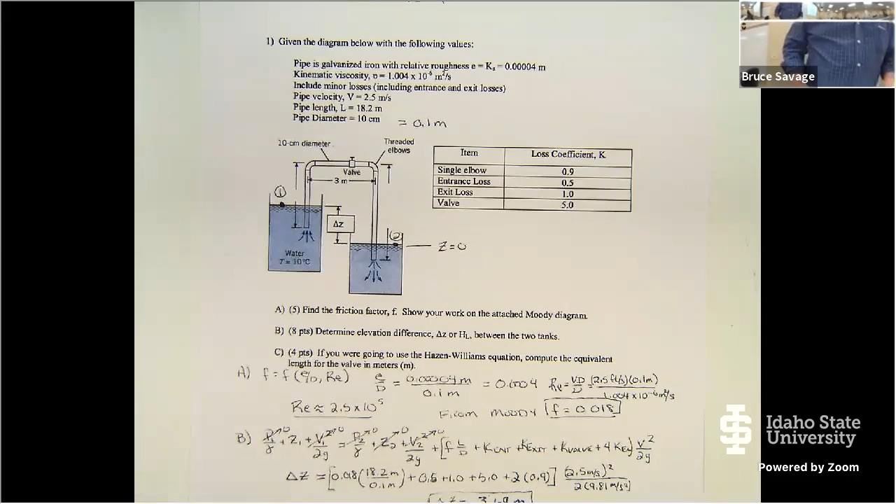So with that, let's go ahead and move through this. Rather than me sit up here and write it down, I'm going to put it up here and we'll talk through it a little bit. Hopefully that'll show up okay, and then we can zoom in a little bit there.

So we've got this reservoir system, two tanks. We know the length, we know the diameter, we know the minor loss coefficients, but we don't know the elevation difference between the two tanks. So the first goal is to find the friction factor, and show your work on the attached Moody diagram.

So I did expect to see something on the Moody diagram. If you wanted to use the equation, that was perfectly fine, and if you used it correctly you should get the same answer, or pretty close to the same. Realizing that it's really hard in the exam if you don't have a straight edge and you're in a hurry.

Question, okay, you never got your exam? Because I thought I'd emailed— oh wait, there's two that I didn't give to the grader. Whoops, and one of them is yours, and the other one's not here. TJ, I apologize, I did have the exams emailed, but your two got stuck somewhere, so I'll try and get yours out right after class. But everyone else get a copy of theirs? You can pick it up from my office. It should have been emailed, except for TJ's, where I made a mistake there.

I didn't write it down here, but there was probably 6 to 8 of you, I didn't keep track of the total, but there was an awful lot of people that wrote the Reynolds number as Q times D divided by the velocity times the kinematic viscosity.

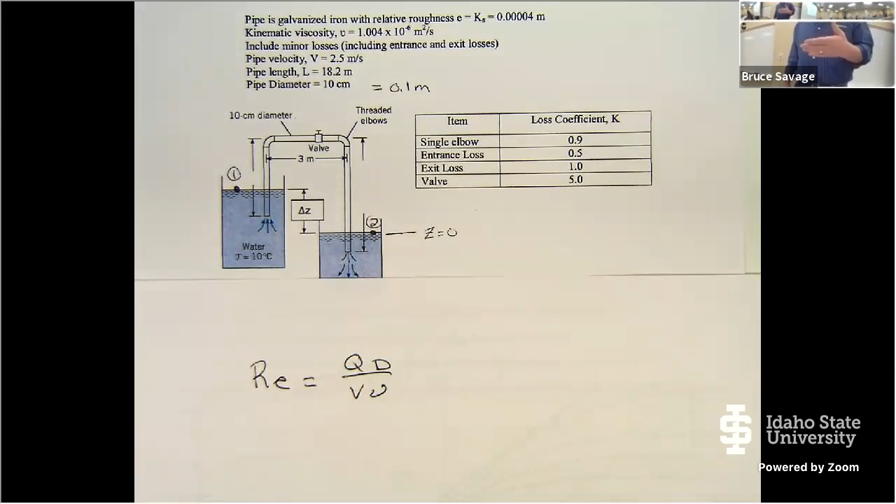I'm not sure where that came from, but there was a good number of students, and it's really surprising to me that you have a card with the equations in front of you and you still get the wrong equation. Not a lot I can do about that. I don't even know where this equation came from, because that is not a dimensionless parameter. So I took out 3 points there.

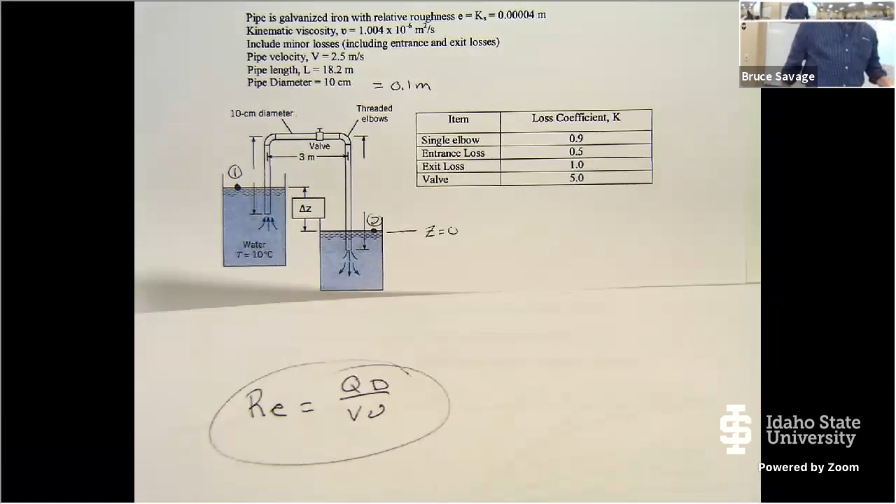It was pretty hard because this is something you've seen in fluids, we've used it multiple times here, and you have an equation card. There's only 2 points, but you should be able to get that, right? You should be able to calculate the Reynolds number, so that is not a dimensionless parameter. I can't remember exactly, but a bunch of students had the same wrong equation for the Reynolds number.

So knowing the roughness coefficient, K sub S, and the diameter, we can come down here and find E over D, and you need to be careful with your conversions. 10 centimeters, 0.1 meters, gives us 0.0004 as far as E over D, and then the Reynolds number, velocity times diameter divided by the kinematic viscosity, or if you want to use the flow rate, that's fine too. We get a Reynolds number of about 2.5 times 10 to the 5th.

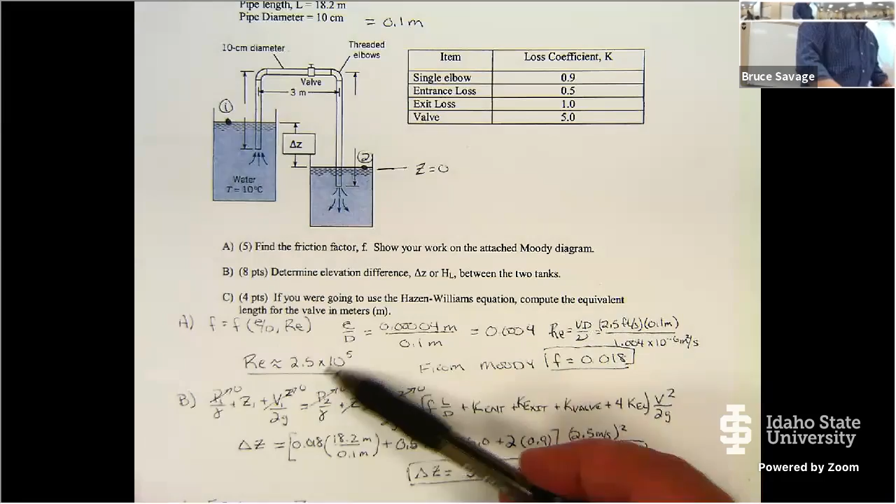So we come over to the Moody diagram. There's 1 times 10 to the 4, 1 times 10 to the 5, there's 2, and if you come, there's 4, so 3 is in here, so 2.5 is going to be right there. I'm going to identify my E over D right here, and follow that line up because we track the line until it intersects with the Reynolds number. When they intersect, we come straight over, and you should have gotten a friction factor somewhere around 0.018.

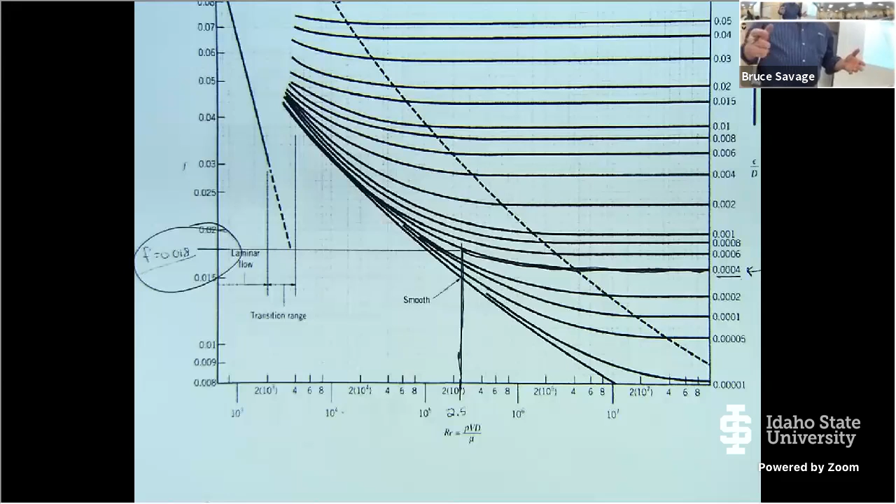I wasn't too critical of that because I know this is during an exam. So if your line didn't come over exactly, if you're at 0.017 or even 0.016, as long as I could see you had these 2 values correctly done and your line was just off, that was fine.

So given that, once we have the friction factor from the Moody diagram, we can come in with our energy equation and put in our minor losses. Everything here is a function of the velocity head. So what I have is Z1, and I set my datum at Z2, but you didn't have to, as long as you realize that Z1 minus Z2 gives me my delta Z, and that's what we're looking for.

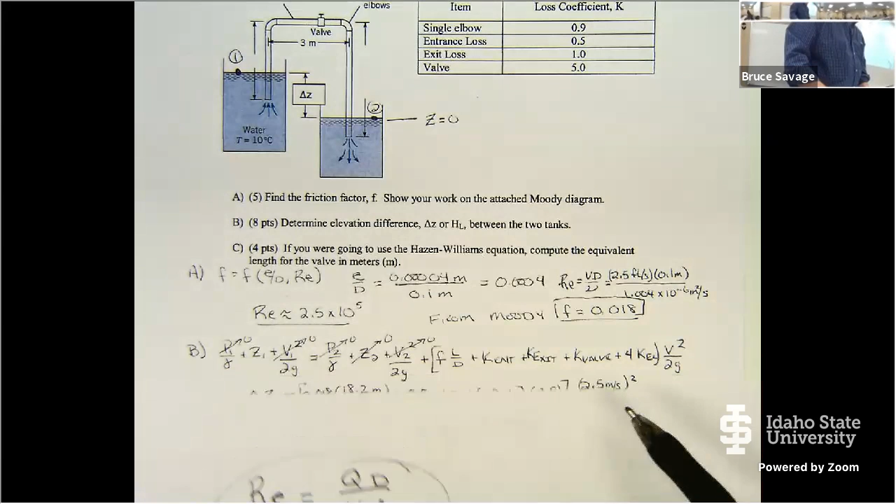So going ahead and solving this equation, I come up with a delta Z of 3.69 meters. You can round off a little bit there, so as long as you're close to that, that's good.

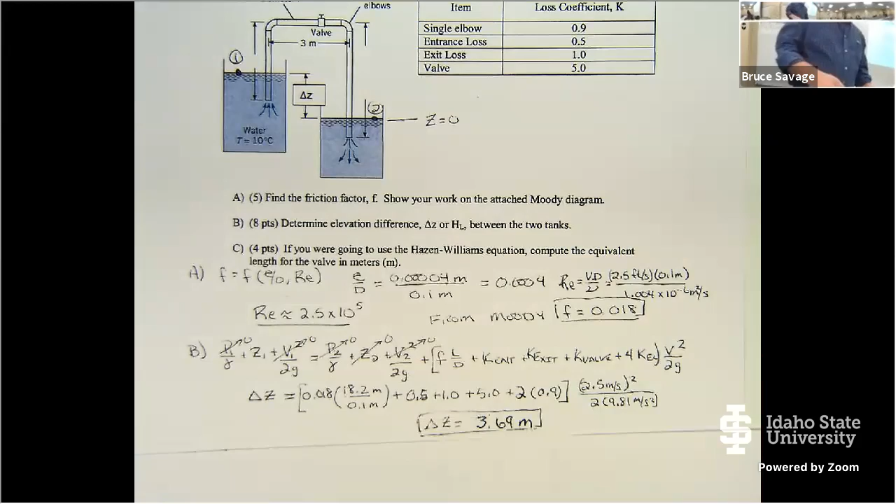And then we talked about the Hazen-Williams equation. If we want to use Hazen-Williams and we have minor losses involved, we even go back to the Darcy-Weisbach concept to calculate that. So that's where we have the minor loss coefficient of the valve equal to F L over D, and all we have to do is solve for L. That gives me, for a minor loss coefficient of 5 and a pipeline with a friction factor of 0.018, a length of approximately 28 meters.

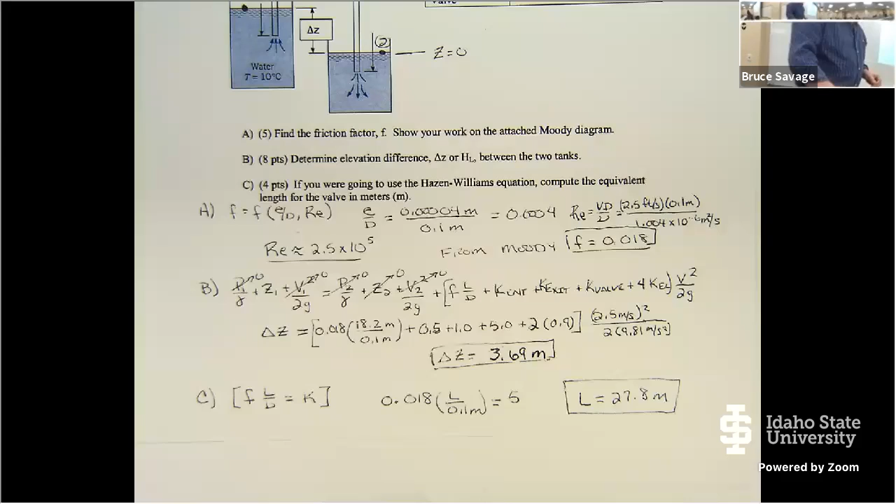Okay, any questions on that problem? This is a great time to ask them, because we are still using these concepts.

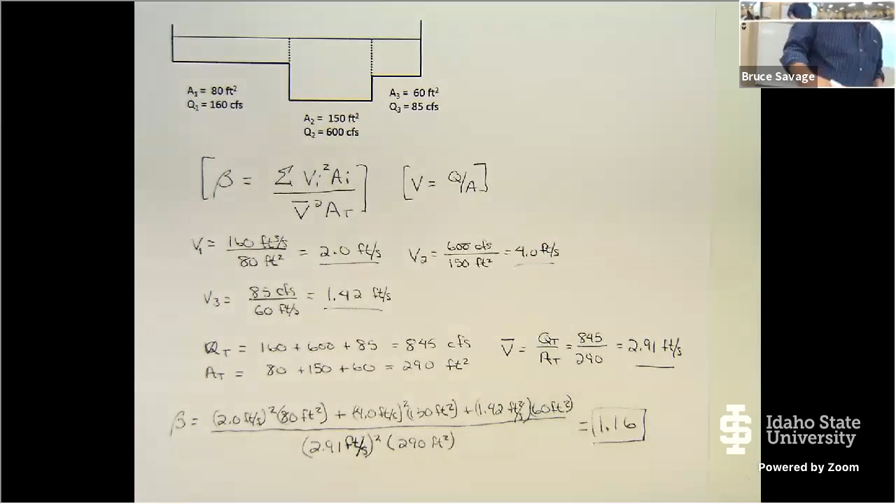Okay, problem number 2 is an opportunity to show me that you know how to calculate the momentum correction coefficient.

Once again, several of you used the energy correction coefficient equation, which is the wrong equation. Very similar, of course, but this is the equation. There are other forms of the equation, and I'm fine if you use those, but make sure you use them correctly. Some of you apparently grabbed an equation out of the book but didn't understand it, so you used it wrong, which gave you the wrong answer. The equation in the book, slightly modified with things moved around a little, will give you the same answer if used correctly.

So we're going to take the sum of the individual velocity squared times the area, and divide that by the average velocity squared times the total area, okay?

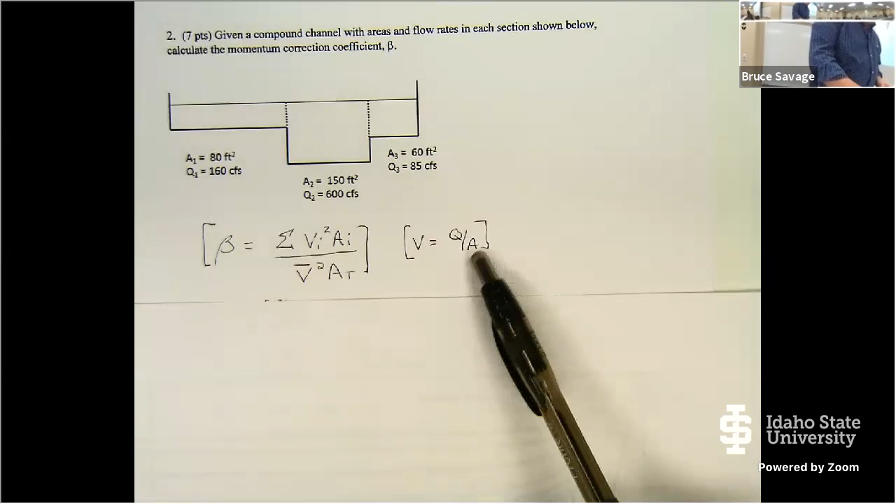Where V is equal to Q divided by A. So I went in there and calculated the individual velocities for V1, V2. Here's 1, here's 2, and here's 3.

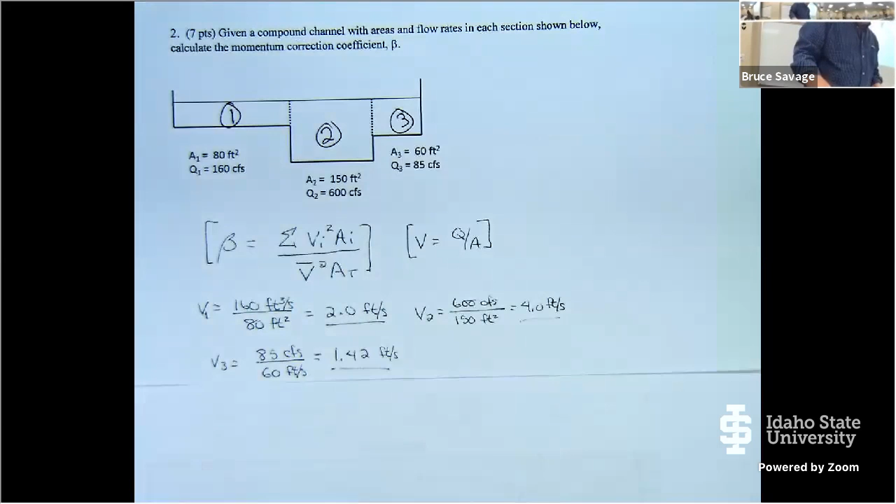Calculated those, and realized that V average, this is another big area that a lot of people miss, is the total flow rate divided by the total area. It's not the average of the 3 individual velocities.

You have to take the whole flow rate divided by the whole area to get the average velocity across the whole cross section. So once we do that, we plug it into that equation. You can see my individual parts here: V1 squared times A1, everything for 2, everything for 3, divided by the average velocity squared times the total area, gives me a beta of 1.16.

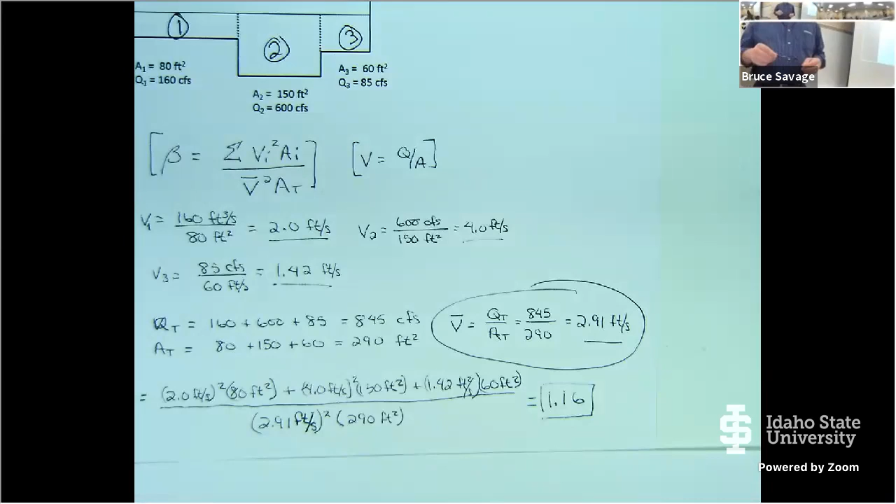If you're ever doing energy correction coefficients and you get an energy correction coefficient or a momentum correction coefficient less than 1, you've done something wrong. And if it's ever greater than 2, you've most likely done something wrong as well. It should be between 1 and 2 for the most part. There are some rare cases where it may go higher than 2, but they're pretty extreme.

Any questions on that? Any questions from those online? Okay.

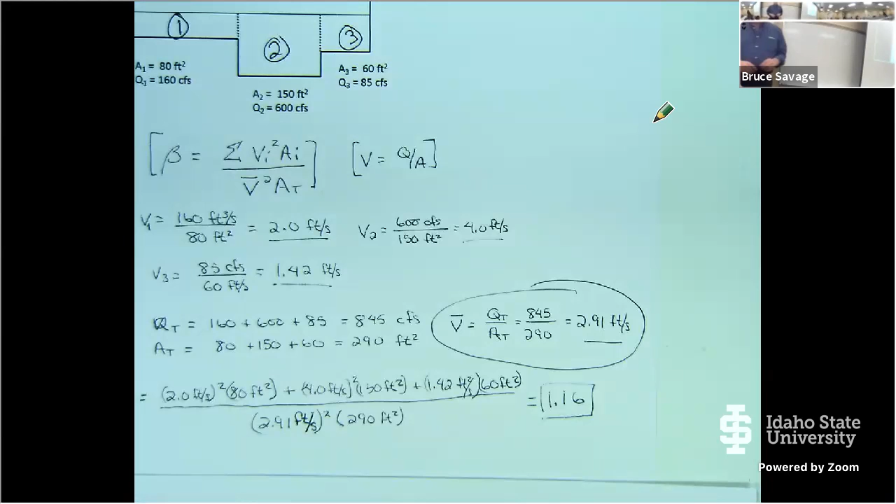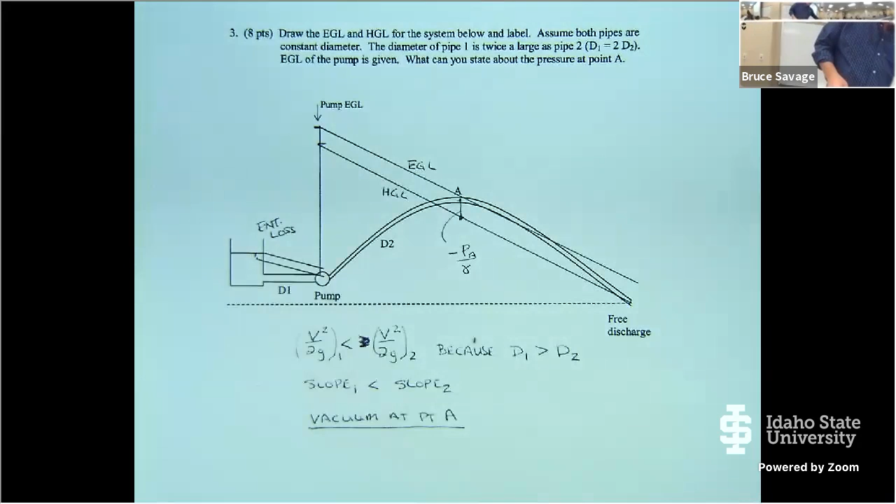EGL and HGL. I was looking for some key concepts here. The things I was looking for was that - so EGL, let me just take a step back, all right?

Remember, EGL and HGLs are only representative of what's going on in our system. They don't have to be exact, but they should be fairly close. And I tried to make these fairly close by telling you what the pump EGL would be up there, so everyone went to the same point.

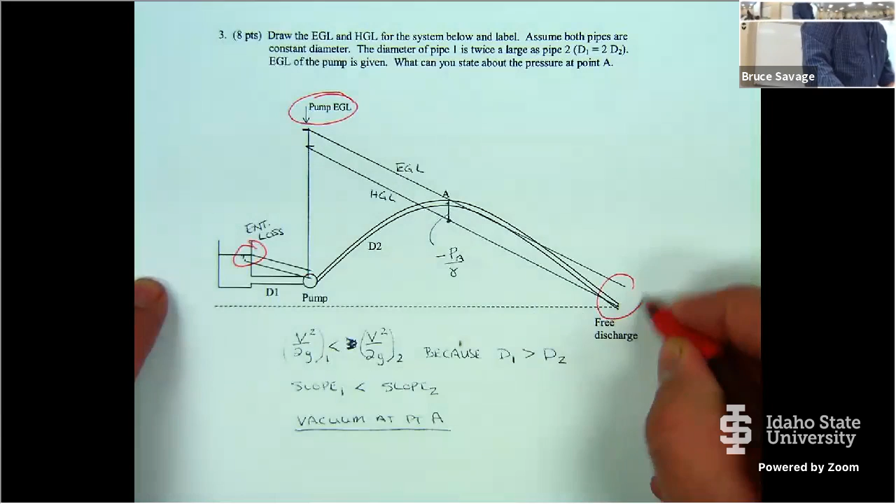So everyone should have the 3 common points: the water surface elevation at reservoir 1, and the free discharge of the pipe. The HGL always starts at the reservoir when there's no velocity and it goes through any kind of free jet. The pump EGL is the amount of energy the pump is going to add right there.

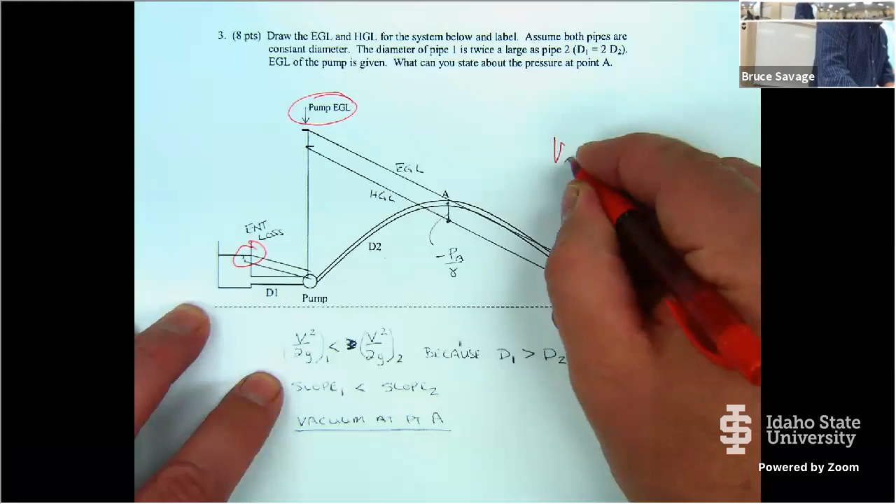The other things I was looking for: because D2 is less than D1, we know that V sub 2 is greater than V sub 1. And I've written it down there in terms of the velocity head, so it doesn't matter, but I was looking to see if your velocity head there was bigger than the velocity head there, because that difference represents the velocity head.

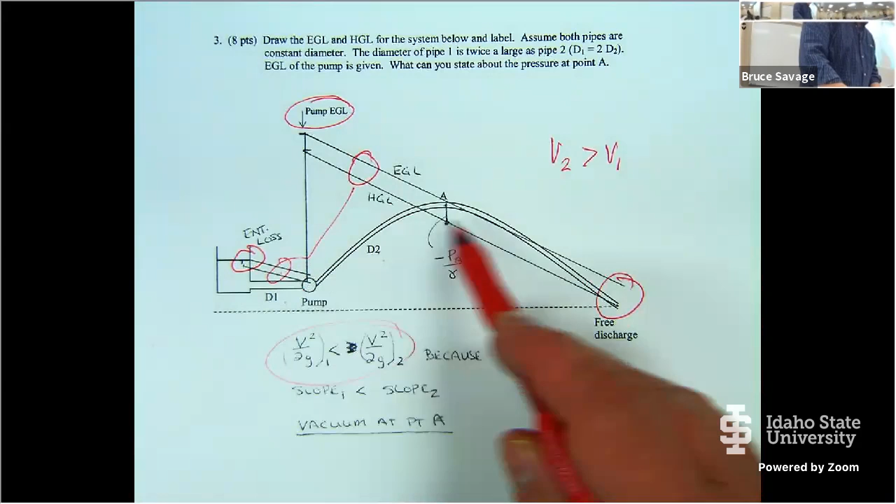So entrance loss coming down there, the slope - this isn't very accentuated on mine - but the slope of the lines at D1 should be less than the slopes at D2, because the friction loss in D2 is greater, hence the slope is greater. It is true for mine, but it's not very accentuated. I probably should have flattened these out a little more and made them more accentuated.

So I was looking for the difference in slope, the fact that you went through the free discharge down here, and given that if you went from there to there, your hydraulic grade line is going to be under point A. So the concept here for the second part of that problem is: what can you say about the pressure at point A? It's going to be a vacuum, it's going to be negative, because the HGL is underneath the elevation of that point, and that's what I was looking for.

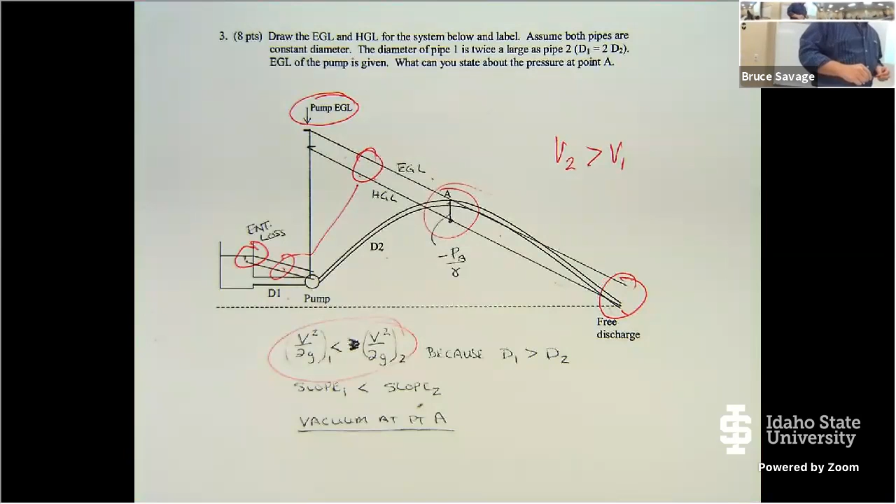Okay, questions on EGLs and HGLs? These are powerful concepts that we will continue to use as we do 3 reservoir problems and pipe networks. Okay, you guys are being awfully quiet today.

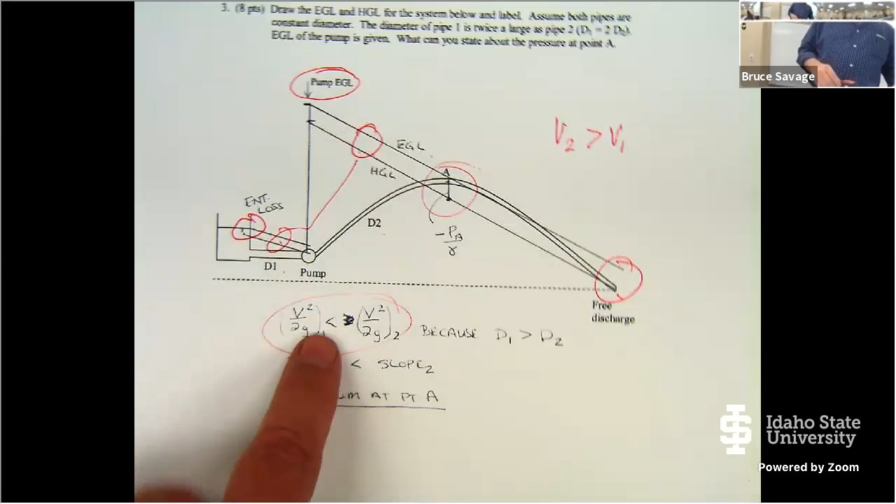Yes? What exactly is the difference between the EGL and the HGL? The velocity head. Okay.

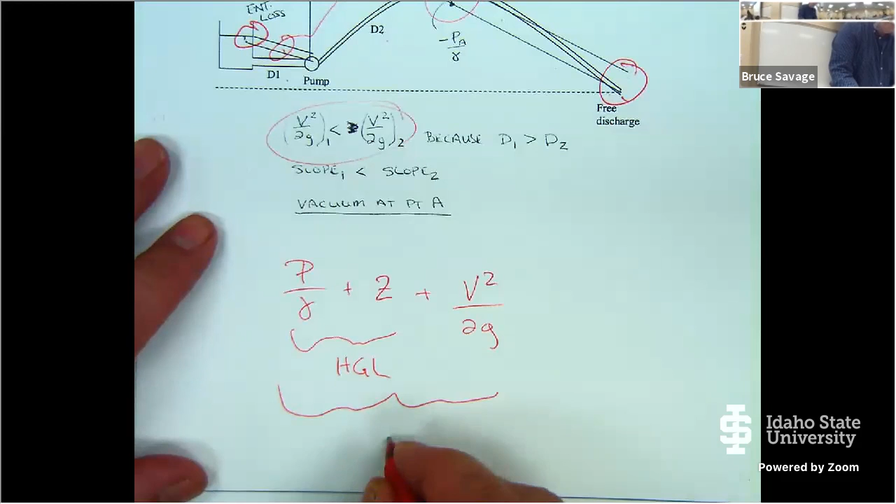So if you think about the energy equation, this right here is the HGL, and everything together is the EGL. So the difference between them is the velocity head.

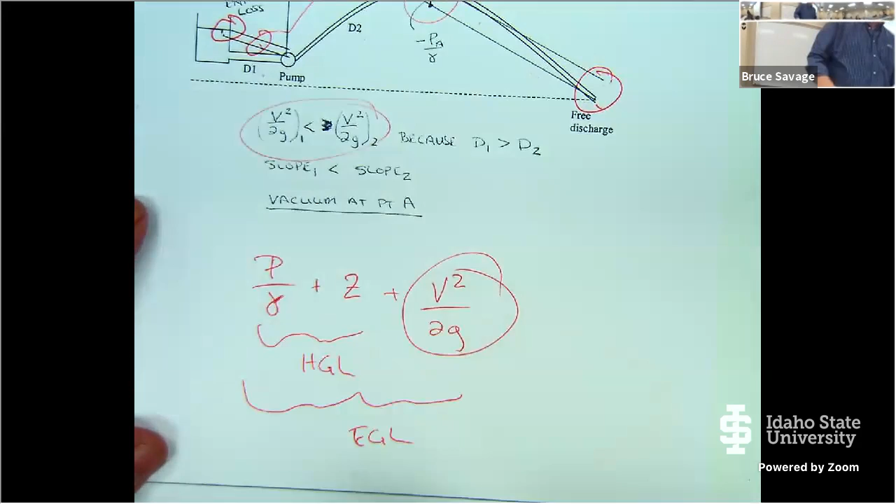And what does P over gamma represent? P over gamma, yeah, your pressure head. That's the pressure head you have in your system. Okay?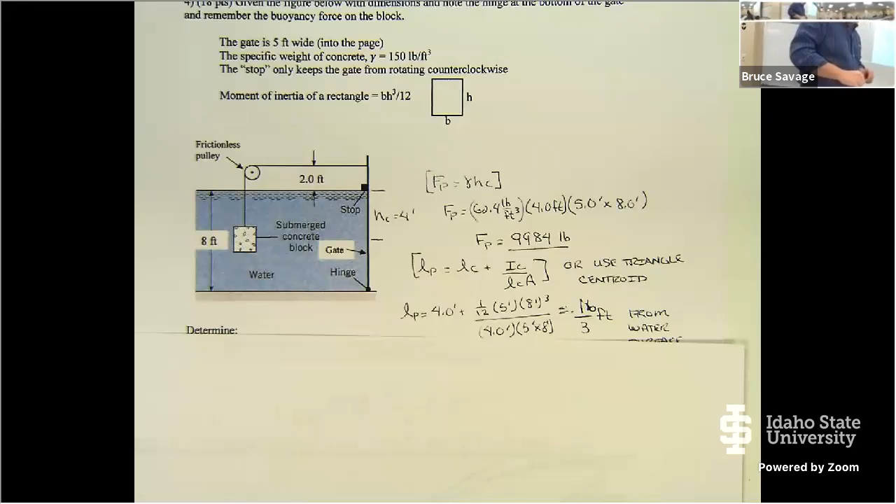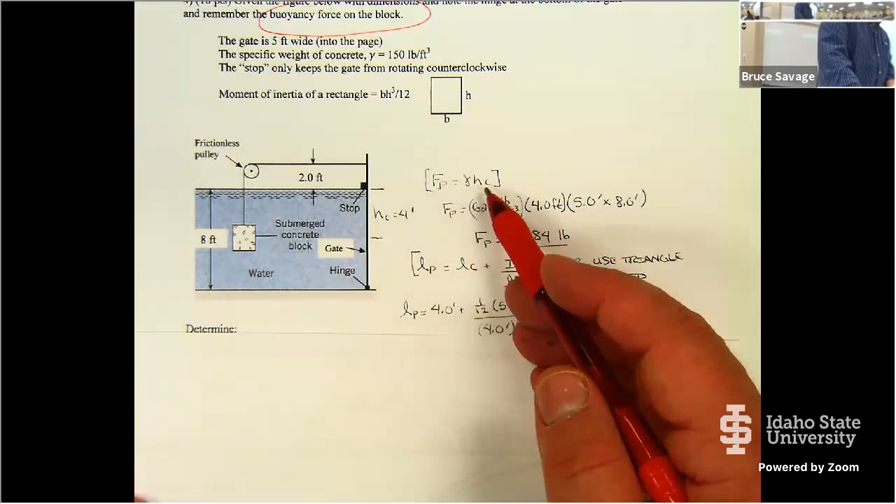And I gave you a hint here: remember the buoyancy force on the block, take that into account because that's easy to miss. So, first thing we find is the pressure force, pressure is equal to gamma H C - you see I had a mistake there, that should be times the area as well. So I did it down here, but I missed it in my equation. So gamma H C times A.

Little hint here. When I'm giving exams, you are more than welcome to draw on the diagram itself.

On homework, I want you to draw free body diagrams. On this one, you should have drawn some mini free body diagrams, but there's nothing wrong with coming in here and saying, I know there's a pressure distribution like this on the gate, if that helps you out.

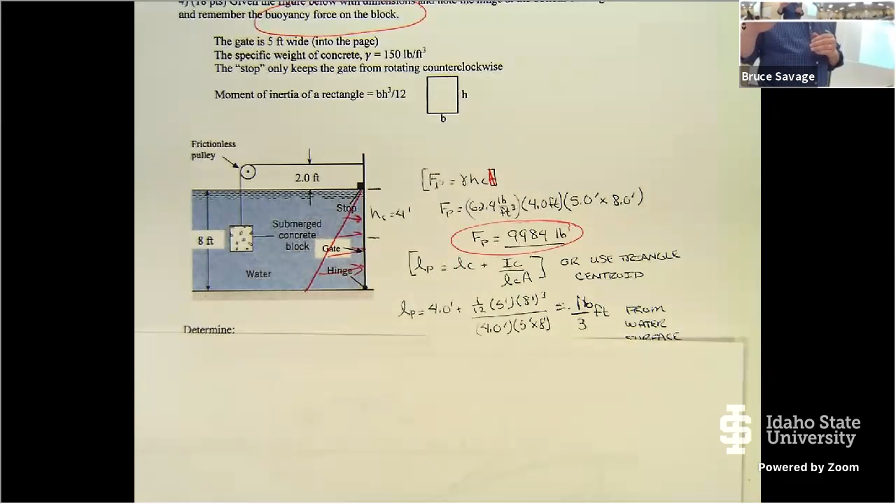I can find the pressure force by gamma HC times A. HC is the centroid of the gate, not the centroid of the pressure distribution diagram. The gate is 8 feet tall, so the centroid is halfway down, because that's where the centroid of the rectangle is at. Knowing that, we can now calculate the location of the pressure force.

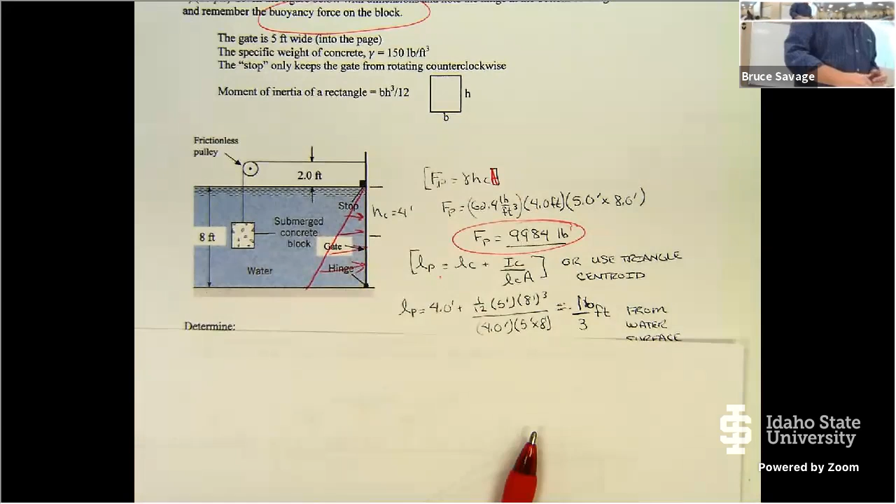And if you remember, and this was fine if you remembered, you didn't need the equation, that the pressure force acts through the centroid of the triangle of the pressure force distribution diagram, that means this distance here is 1/3 h.

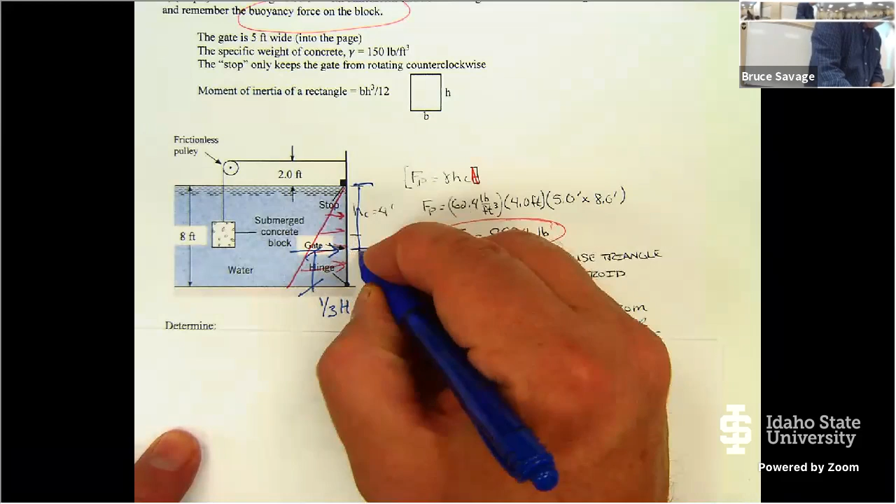Now if you go ahead and use the equation, you're going to find out it's actually 2/3 down this way, or in this case, because it is 8 feet tall, it occurs at 16/3 feet down from the top. Remember, the LP measures from the top.

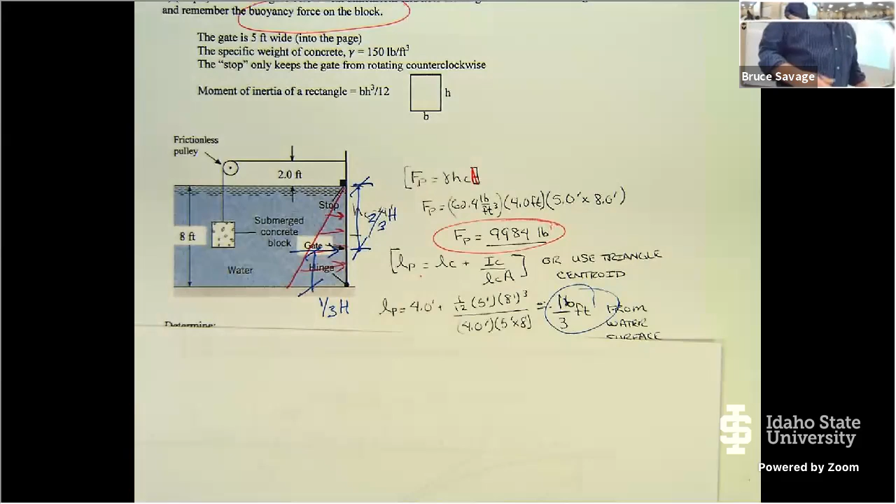So the equation is going to give you 2/3 of h right there, hence the 16/3, and you could have just used that, and I would have been fine with that.

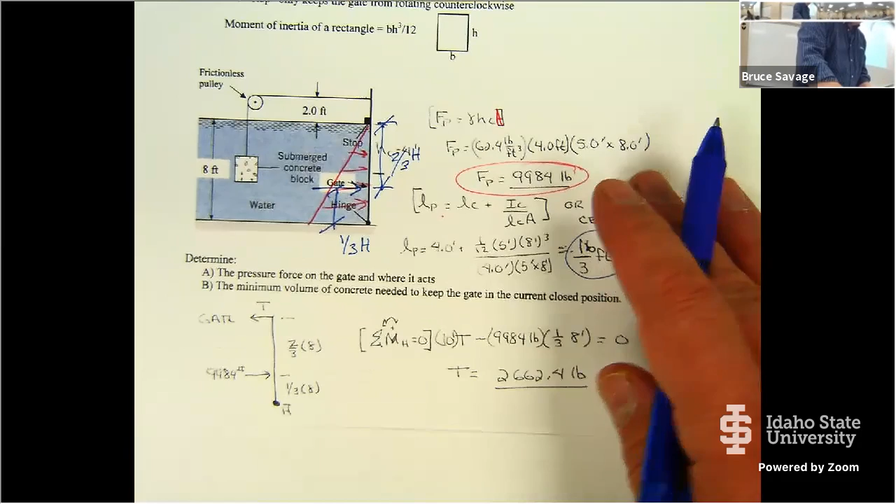But now that we know the forces on the gate, we can now draw a free body diagram of the gate to calculate what's going on up there in that cable. So down here, I did a quick free body diagram. I've got the hinge down here.

Now technically speaking, there would be a force right here on the hinge too, right? Force in the x direction on the hinge. So I've got 2 unknowns, but in order to get rid of one of them, I can take the sum of the moments about this point to find the tension.

Or if you wanted to, you could take the sum of the moments about the tension, about up here, and calculate the force at the hinge, and then you can take the sum of the forces in the x direction and get T. That's just the longer way of doing it.

Think back to basic statics. We've got those 2, well, we got 3 if you want to take sum of the forces in the y, 2D problem. So you could have done one extra step and still found it by taking the sum of the moments about T, but the easiest way is to do it about the hinge, because it gets rid of this one, which I don't care about.

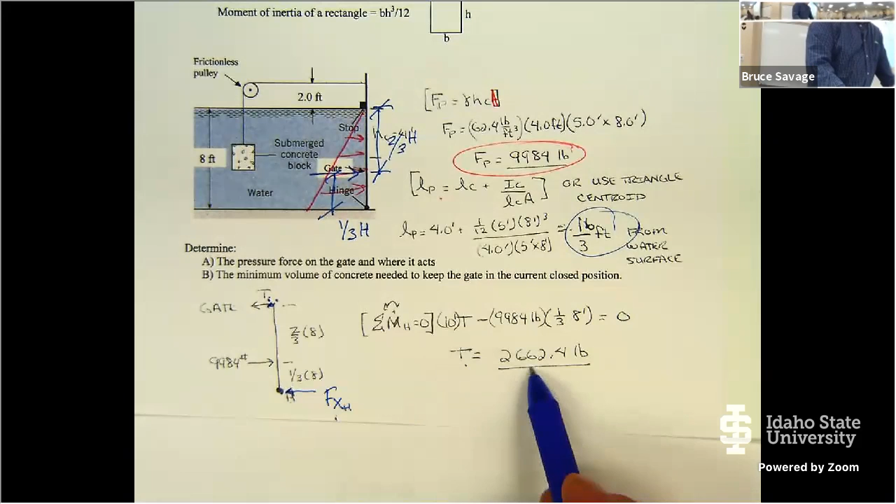Now I can find T. T is 2662. And once I find that, now I can draw another free body diagram over to my block, noting that I have a tension pulling up, I have weight of the concrete pulling down, and I've got the buoyancy force also trying to lift the block.

So sum of the forces in the y direction, noting that the weight component is the weight of the concrete times the volume. The buoyancy force is the weight of the fluid that is displaced times the displaced volume, and they happen to be the same volumes, just different gammas.

So now I can go ahead and put that in my equation, and I can solve for my volume, and it's right around 30.4 cubic feet.

Any questions about the concepts?

Mr. Brooks: Yes, how did we get the 10? Why multiply with 10? How did I find T, the tension? No, the 10. The value of 10.

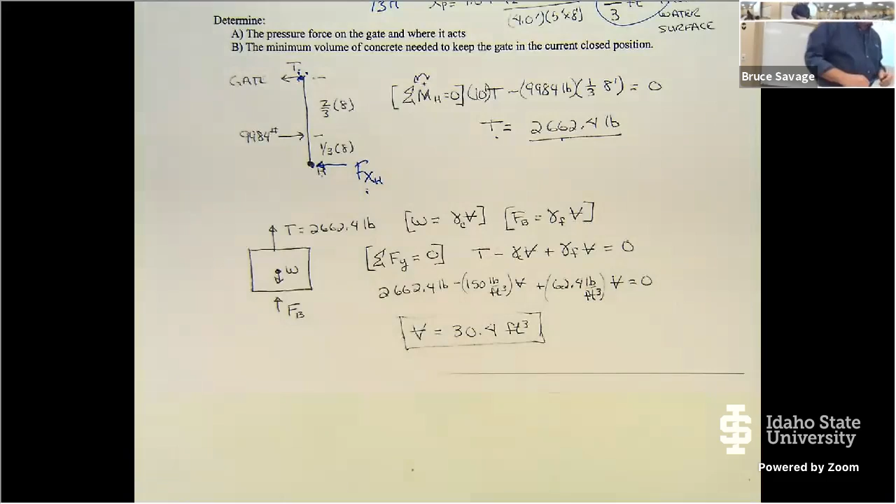The value of 10 comes from the fact that I know the water level right here is 8 feet, and the gate where the cable connects is 2 feet above it. So that's where the 10 comes from.

Okay. Other questions? Okay, all right, so let's move on.

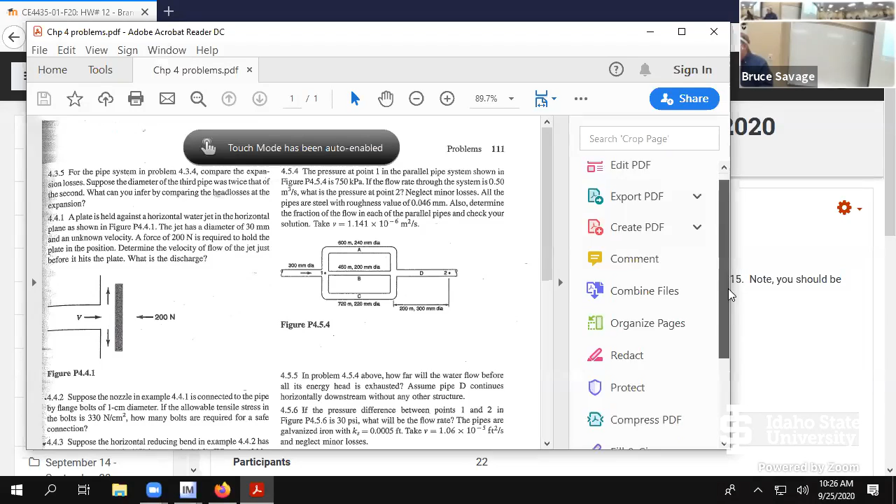Okay, so assume that the pressure difference between points 1 and 2 is 30 psi. What will be the flow rate? All right, the pipes are galvanized iron. We got that. Okay, so it's coming back to me now.

So this is the scenario when we know the head differential between these points, but we don't know the flow rate. So we're trying to find it, and we need the flow rate to calculate the Reynolds number to find the friction factor. So this is a complex problem that requires you to iterate on a branch network, solving this branch multiple times. You have to make some guess as to either friction factor or flow rate in each one of those pipes to get an initial value.

And so while it seems simple, the pipe comes in, splits into two, and goes over, it becomes an accounting mess because you've got so much going on. Now there are ways to solve this where it's not so bad, if you have access to a solver like Excel or some other solver. So the pipe comes in here, splits, goes over here, and we get this point down here.

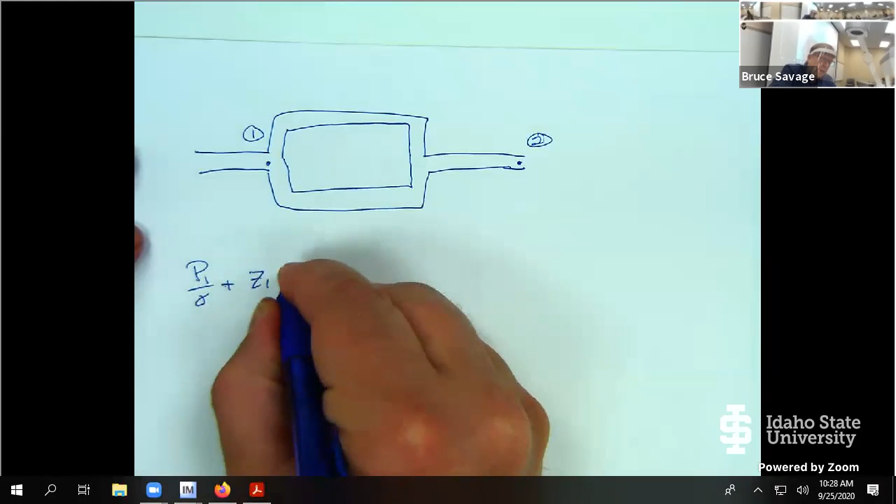Okay, so if this is point 1 and this is point 2, our major equation is going to be the energy equation between points 1 and 2.

Noting then that our head loss has to be the loss - I forgot, how are these numbered? A, so this one's A, and B, C. Okay, so noting then that the head loss is going to be either up around A and over to point 2 through C, or B.

So plus then F, if I take the top route, F sub A times L sub A divided by D sub A times V sub A squared over 2G, plus then F sub C times L sub C divided by D sub C times V sub C squared over 2G.

Okay, so that gives us one equation. But we also note that the head loss across A is equal to the head loss across B, right? We know that. So I could just as easily replace this with the head loss at B, because they would be the same thing - doesn't matter if I'm going across A or across B.

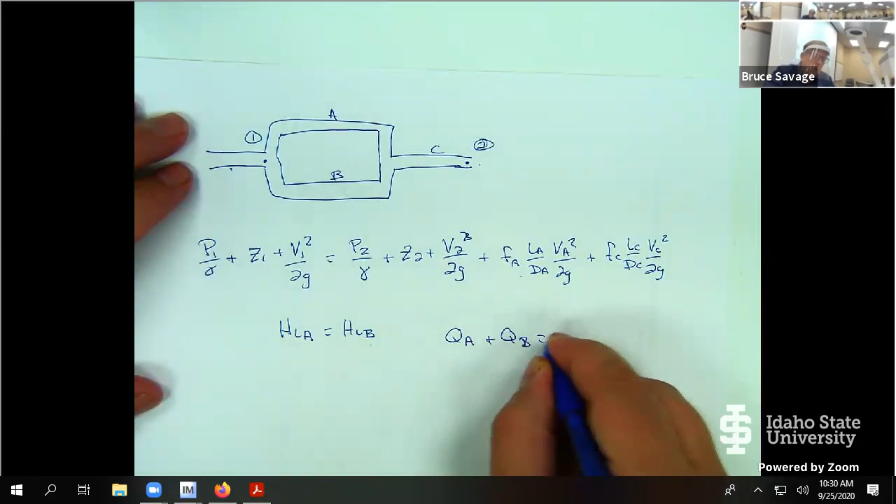And then the other equation I'm going to need is the relationship between those: I know that Q sub A plus Q sub B is equal to Q sub C, which you could rewrite as V sub A times A sub A plus V sub B times A sub B equals V sub C times A sub C.

And we identify then what our unknowns are. Well, the unknowns are V sub A, V sub B, and V sub C - that's what our unknowns are, and all of our friction factors. Now our friction factors are unknown too, but if we have our velocities, then we know our friction factors. So we're back to what we did with the single pipeline - yes, these are unknown, but now we have to iterate.

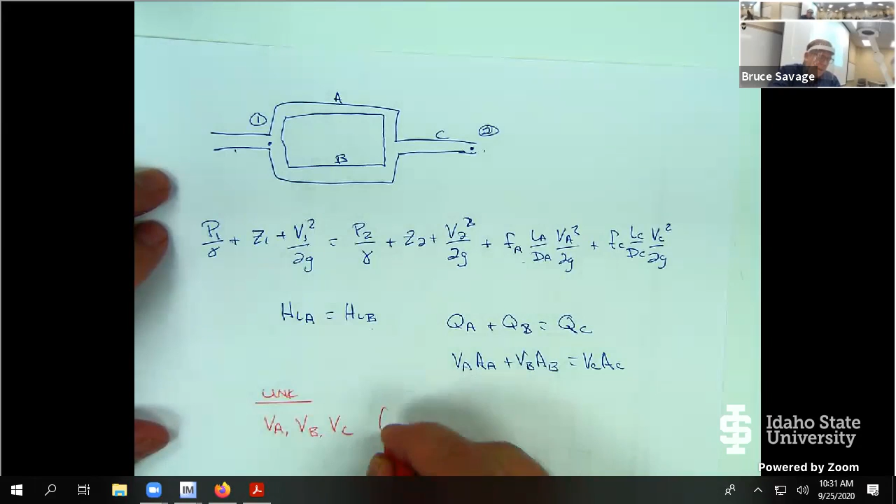So once again, we select a friction factor, stick that friction factor in here, and we can solve through these relationships what our velocities are. Now we take our velocities and E over D and go back and refine our friction factor, and then do the whole process again until it converges.

So you would assume a friction factor for A, B, and C that are all the same, because they'd likely be different - you could either do the same or different, doesn't matter. But if you overestimate A, that's going to potentially reduce B and C. So how do you know which way to move? You don't have to know which way to move - the equations automatically fix it for you, because once you assume a friction factor, it's going to give you a flow rate. That flow rate, you'll find a Reynolds number, and with that Reynolds number, you'll go into Moody, and it will tell you which way it goes.

Okay, it will automatically adjust. Now, if you're saying, wow, would we really do this in practice? Well, in reality, we have equations for the friction factors. We would use Swamee-Jain, or the Colebrook-White equation if you want to get really fancy.

So if we say our friction factors are unknown, our equations to solve for those are the three friction equations. But they introduce three more unknowns, the Reynolds numbers, since we have to write the Reynolds number for three different pipes.

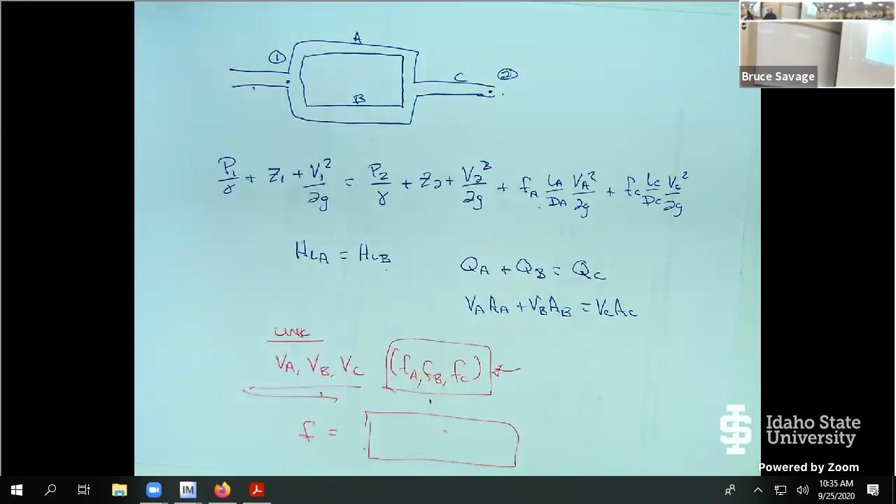Okay, so that's a really good question, and I think this points out where we need to be really careful. Let me come back to this problem here. So they gave us the K.

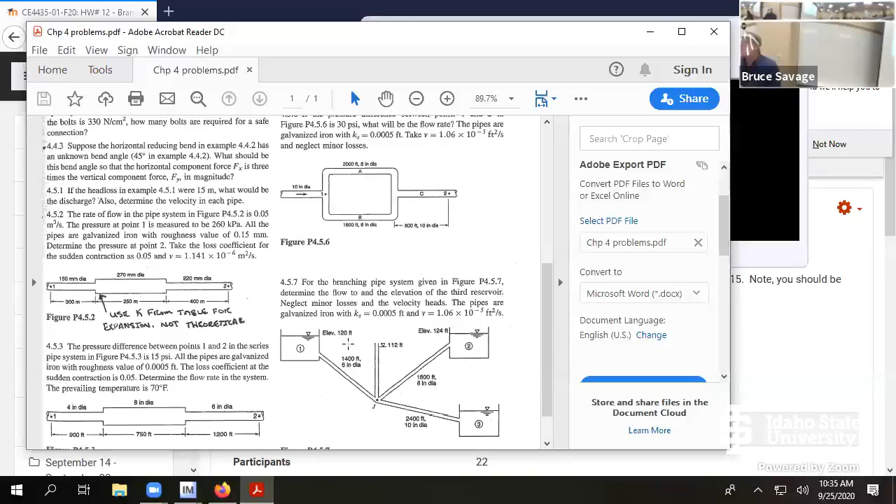What's that? Sorry, your cursor is down on 4.5.7. We're up on 6. Oh, thank you. All right, so they give you a K factor. Tammy, I'm not trying to single you out here, but when you say they gave you a K factor, tell me in your mind how this correlates back to Hazen-Williams.

The friction factor times L over D is equal to K. Okay, so good, you helped explain here.

So we need to make sure that we clearly understand that the K in this problem is the equivalent sand roughness, which is completely different from the minor loss coefficient. The equivalent sand roughness is the average height of the sand particles. So that is not the K that we would bring it back to. But nonetheless, Cami raises a really good point.

While the K is different, what we do know is that this is galvanized iron. So if you wanted to, you could actually go into a chart and find the Hazen-Williams coefficient, C sub HW, for galvanized iron, and you could write the Hazen-Williams equations for friction losses across each of these pipes, and it would be a whole lot easier because it would fall right out and you wouldn't have to iterate.

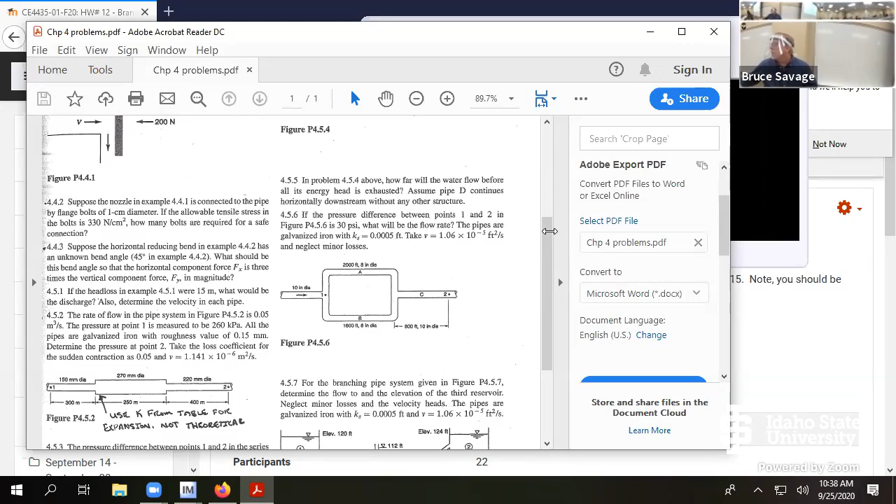Anyone online have questions? Could you maybe go over the first homework problem a little bit?

Okay, sure, let me jump back up here. The first homework problem is exactly the same as the one we just went over, except now there are 3 pipes. Rather than iterate, I gave you the friction factor for the first 3 pipes. Let me bring this up here. This pipe comes in, and I'll turn this back on for those online in just a second. For those here, give me a minute to do a quick sketch.

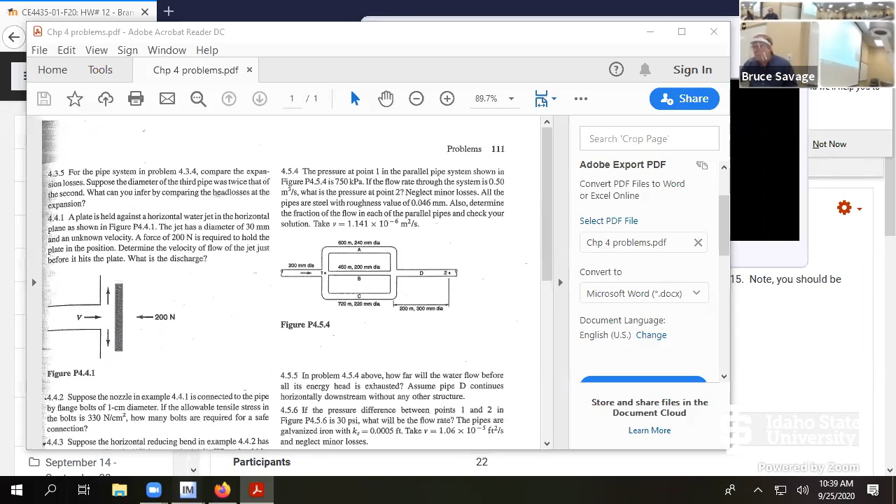I think this is a little different in that they give us the flow rate. In this case, the flow rate is known: Q is equal to 0.5 cubic meters per second. Now jump back to this. So this is kind of the same thing. I'm going to write the energy equation from point 1 to point 2.

I'm going to note my head loss is a function of whatever path I take, whether I go across A, B, or C. So let's say A again: F sub A times L sub A divided by D sub A times V sub A squared divided by 2G, plus F sub D times L sub D divided by D sub D times V sub D squared divided by 2G.

Noting that this one right here could be replaced by F sub B times L sub B divided by D sub B times V sub B squared over 2G, or F sub C times L sub C divided by D sub C times V sub C squared divided by 2G.

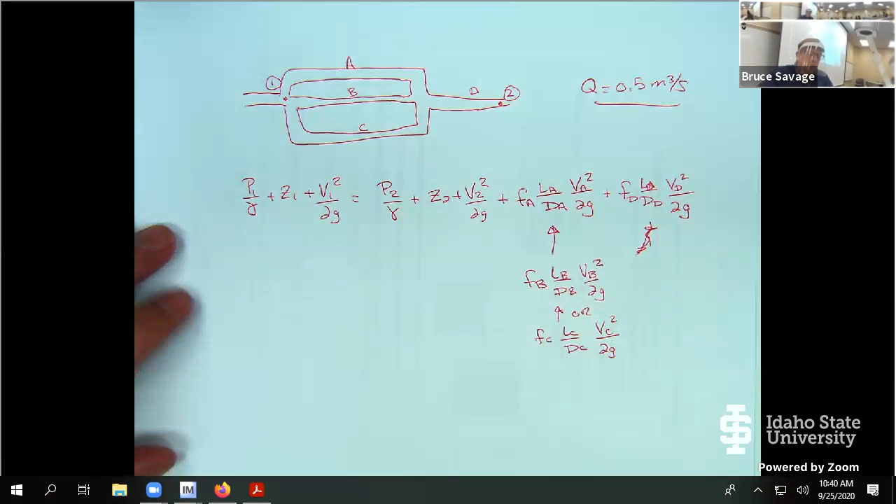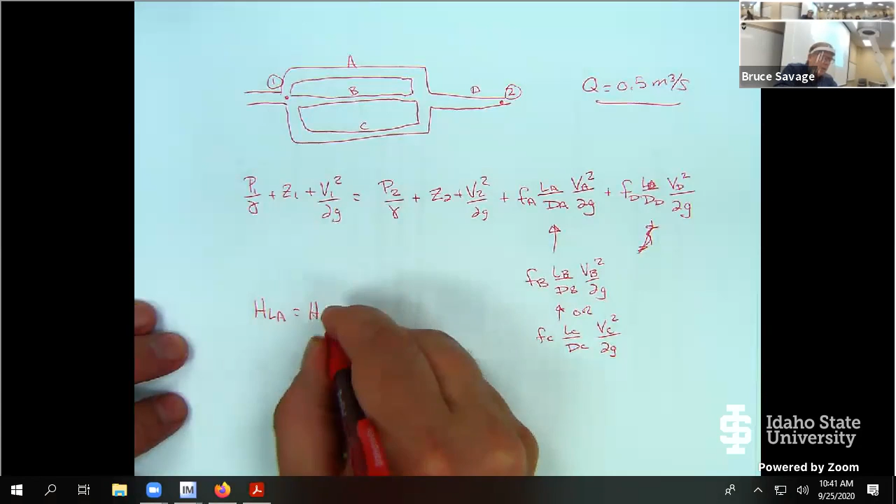It wouldn't matter, I could use any one of those. I can also note that the head loss across A is equal to the head loss across B, which is equal to the head loss across C, meaning these three things are equal. I also know that Q sub A plus Q sub B plus Q sub C equals 0.5 cubic meters per second. So that's my knowns there.

Now note, I gave you these three values right here. What I did not give you was F sub D, but we know the flow rate and we know the roughness height, so now we can find F sub D using the Moody chart or the equation. So F sub D is now a known.

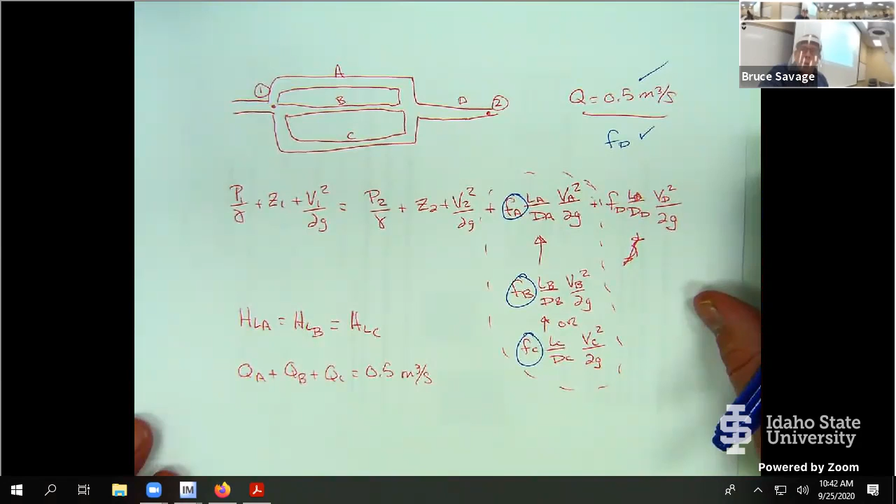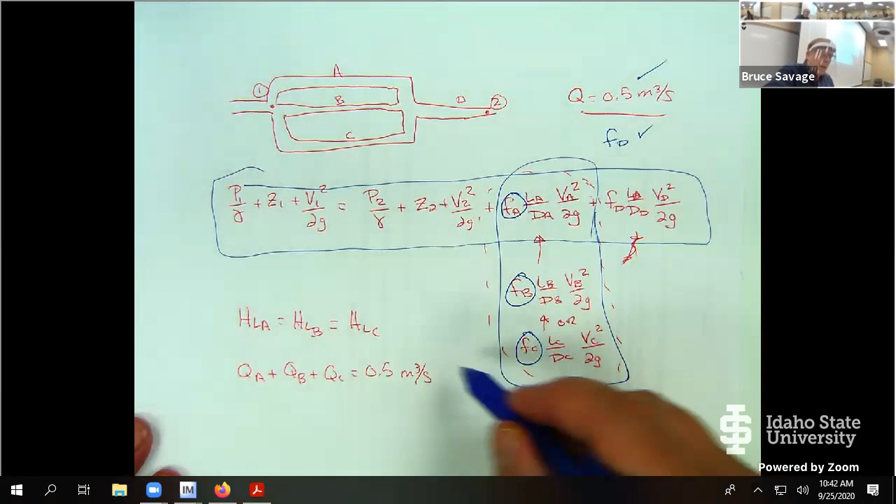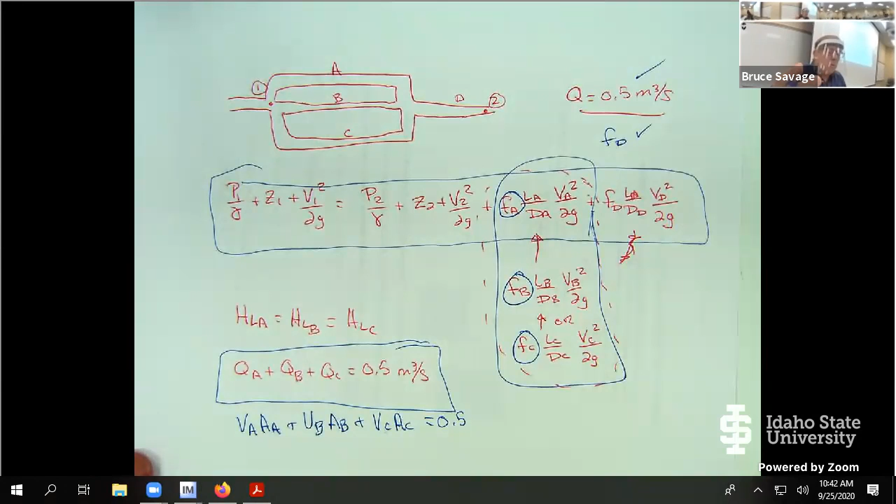So now it's basically the same process as the other problem. I can solve these equations, realizing all three head losses are equivalent, and rewriting the flow equation as V sub A times A sub A plus V sub B times A sub B plus V sub C times A sub C equals 0.5. So my three unknowns in this case, since there are no unknown frictions and Q sub D is not unknown, are the three flow rates, and I have my three equations, 1, 2, and 3.

Okay, so Laura, does that help a little bit?

Okay, I think you're still muted. Laura, did you say something? Yeah, that helps, sorry, I forgot to unmute. That's fine, joys of technology.

All right, so it seems like we had a little bit of a problem with this. Do you guys have class at 9? Are my office hours at a bad time? Okay, just wanted to make sure. Since it seems like there are quite a few questions about this, I will give you more time to work on this if you want to keep working on this homework, okay, so that's not a problem.

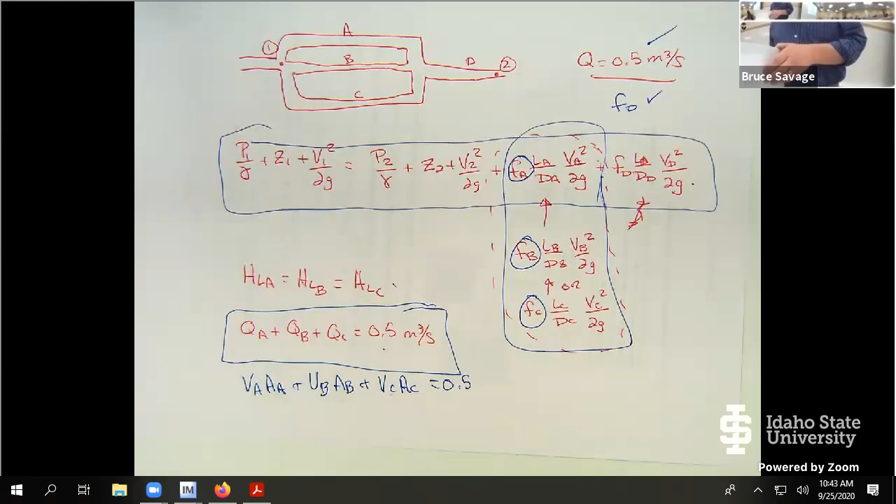All right, any other questions? Okay, we're not done yet, it's good quality time here. One of my favorite sayings about higher education: the only place you're willing to pay more to get less, right?

Passing down the road, is it gonna be okay? Yeah, no, not right there.

For those online, this is posted to Moodle, so you can print off a copy. Although we're not going to get all the way through it, but at least we kind of set it up today.

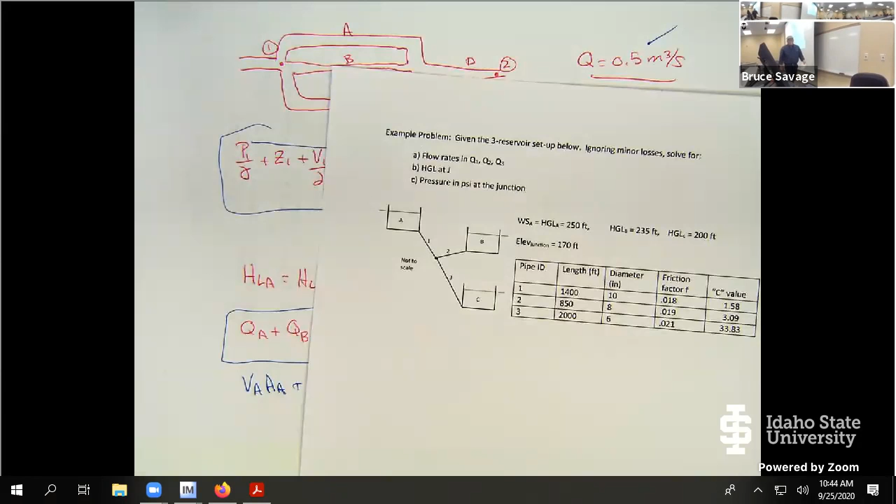So we have a 3 reservoir problem here, and I wanted to work through the numbers.

Given the 3 reservoir setup, ignoring minor losses, solve for the flow rates in the 3 pipes, the pressure or the hydraulic grade line at junction J, and the pressure at the junction as well.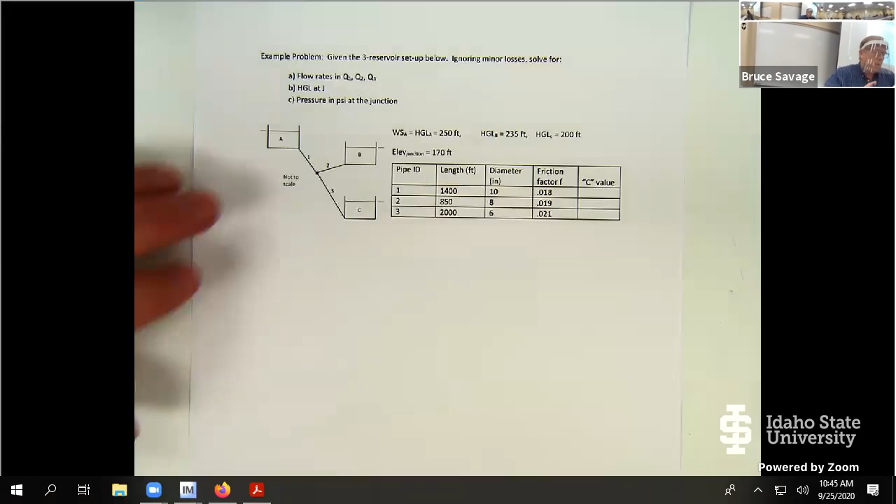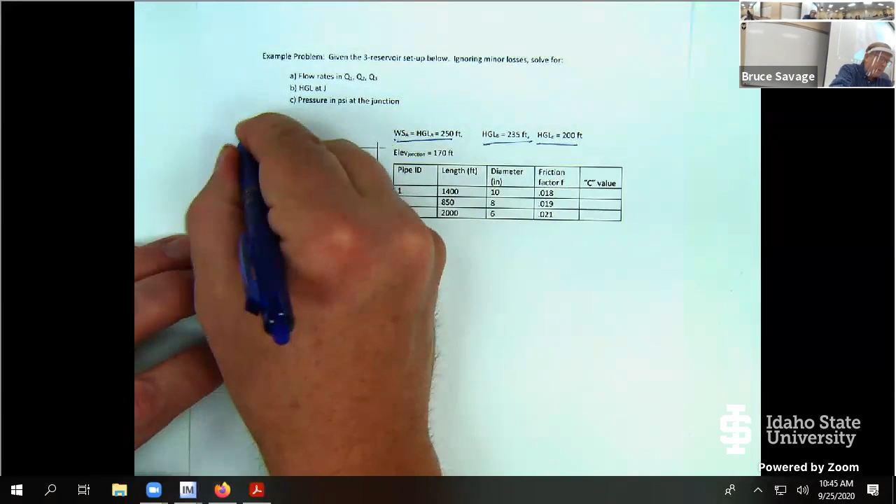Noting that my water surface elevation is equal to my hydraulic grade line, reservoir A is at 250 feet, B is at 235, and C is at 200.

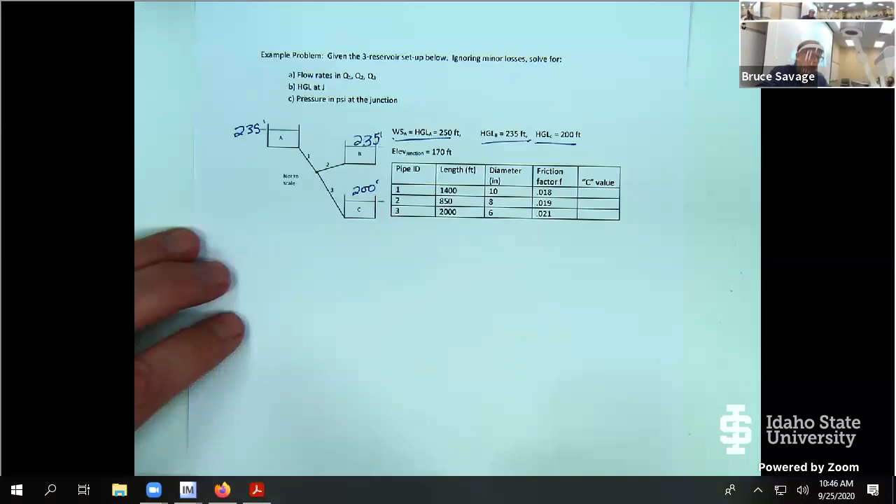250, thank you. It's kind of interesting that wearing glasses with this shield distorts everything a little, because it's bent, and I'm going to use that as my excuse, whether I should or not.

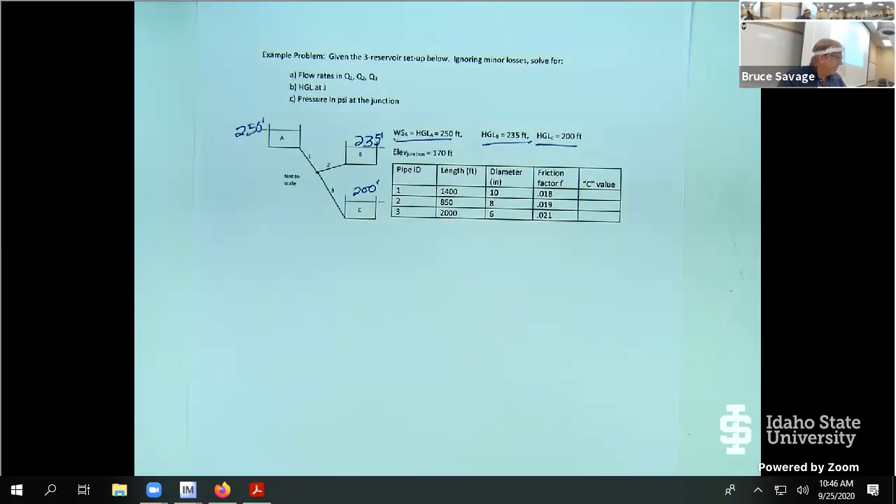All right, so when we look at this, tell me, what are the directions of flow in this system that we absolutely know?

Going down from A? Okay, so A is definitely flowing down here because it has the highest amount of energy. And from there, it's flowing into C.

Can we say anything about B? We don't know, right? We don't know whether the flow is going from B or to B. Or in other words, to B or not to B.

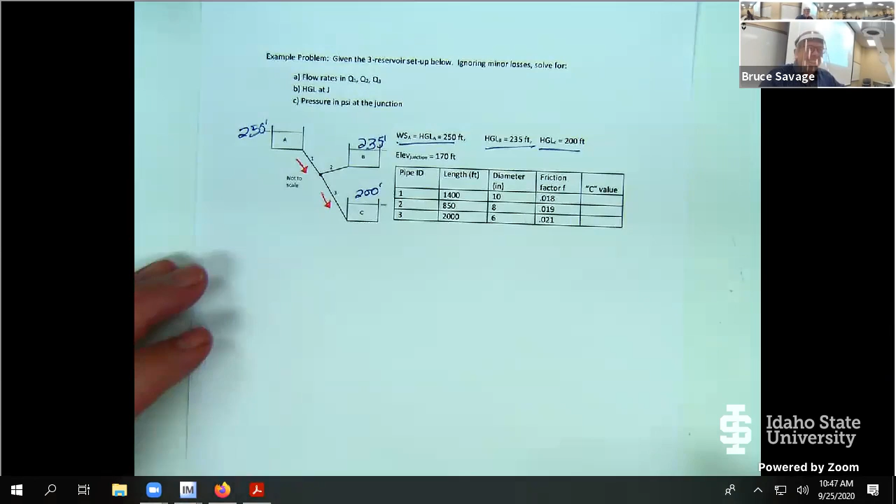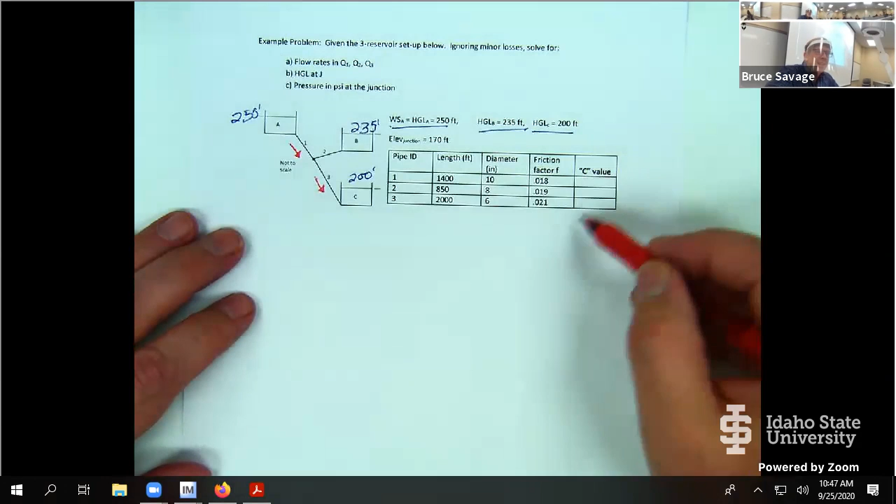So that's what we need to figure out here. In order to do that, we can simplify our problem by first finding the C value. Remember, C equals F L over D times 1 over 2G A squared, plus the sum of the minor losses times 1 over 2G A squared, in simple terms, assuming it's all the same diameter of pipe.

In this problem, we're going to ignore minor losses to keep things simple, so I can go ahead and solve for my different C values.

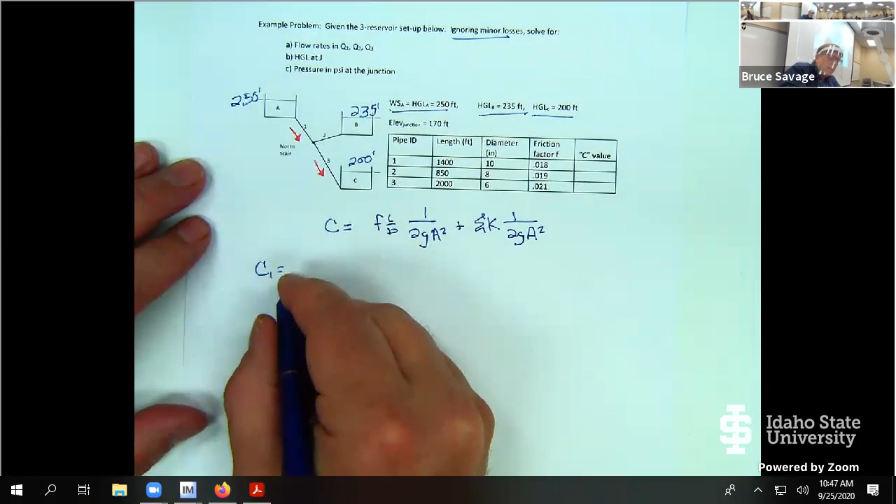C sub 1 equals 0.018 times L, which is 1400, divided by the diameter - make sure you use the right units, 10 inches divided by 12 to get it into feet, to make that dimensionless - times 1 over 2G, 32.2, times the area, which is pi divided by 4 times 10 divided by 12 squared, then I square my area as well. When I do that calculation, I get 1.58.

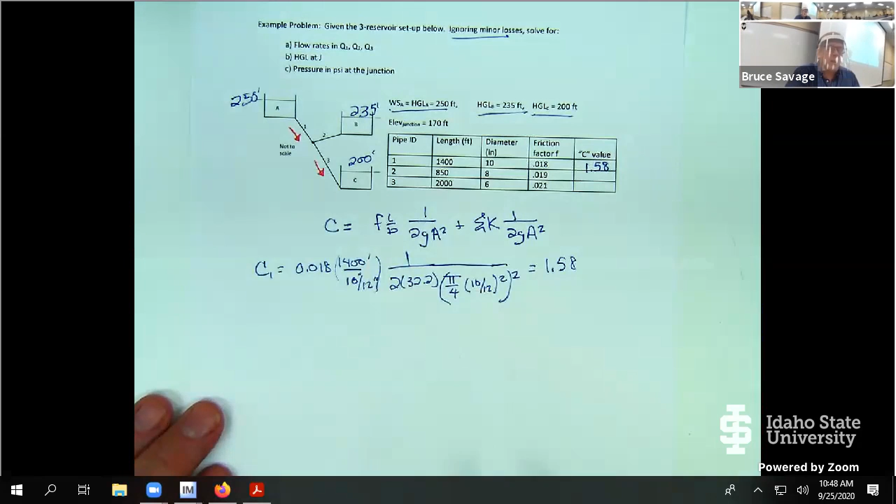So C sub 1 is 1.58. I could do this exact same thing for pipe 2 and pipe 3, plugging everything into this equation. When I do that, I find C sub 2 is 3.09 and C sub 3 is 33.83.

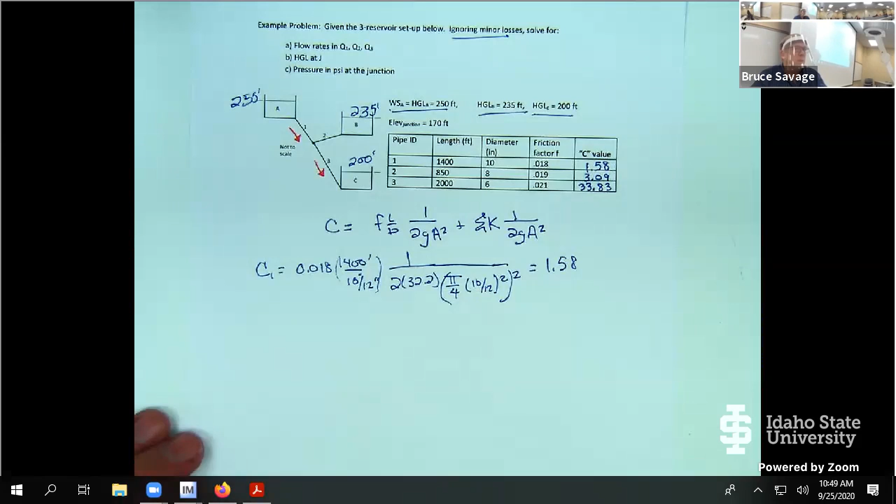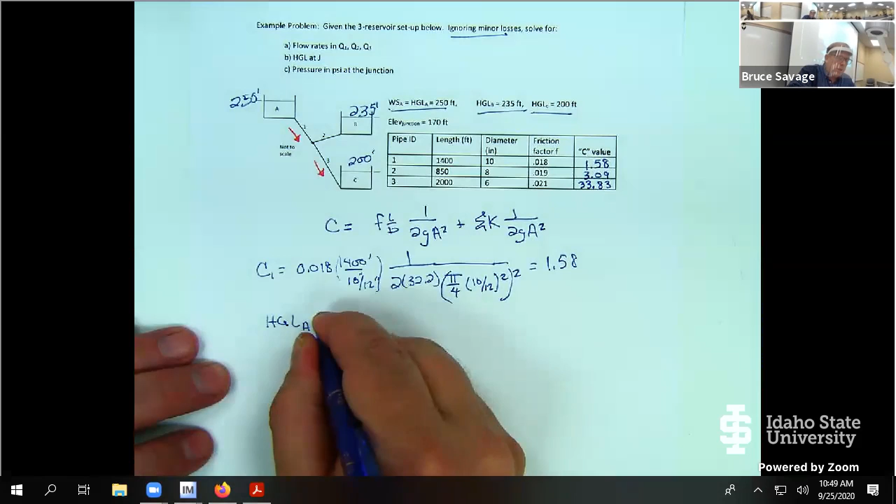From here, I can now set up my equations to calculate the flow. The hydraulic grade line at A - assuming I know the flow direction, going down slope, so I'm losing energy - minus C sub 1 times Q sub 1 squared is going to give me the hydraulic grade line at the junction.

And then I can start at the junction, and say the hydraulic grade line at the junction minus C sub 3 times Q sub 3 squared is going to give me the hydraulic grade line at C.

And then the one at B, I could write that multiple ways, but let's stay with the hydraulic grade line at the junction plus or minus the friction loss, C2 times Q sub 2 squared, to get me to the hydraulic grade line at B. So now I have my three energy equations.